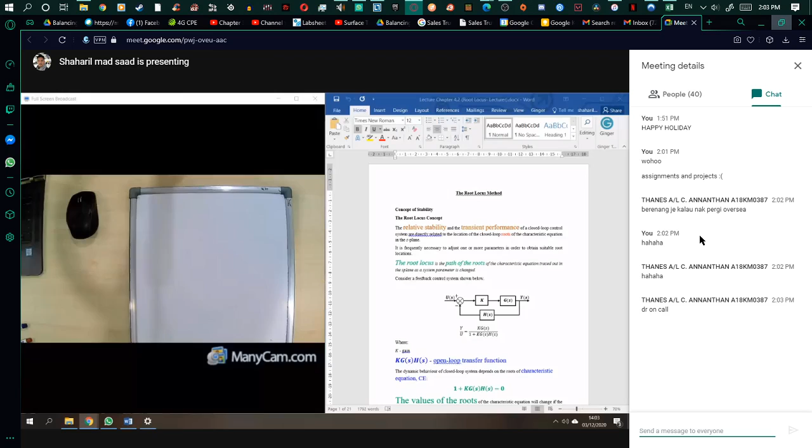Now Johor Bahru is quite critical, right? The numbers of COVID-19 is increasing day by day. Okay, alright. Doctor on call, okay, good.

Last Sunday, yes, we learned about root locus. Okay, so we drew a root locus there. By the way, there are some rules that you need to follow. The most important thing is the starting point is the open loop transfer function, KGH, right? And then you plot them. If it's a pole, you make a cross; if it's zero, you make a circle, right? And this is the rule for the locus.

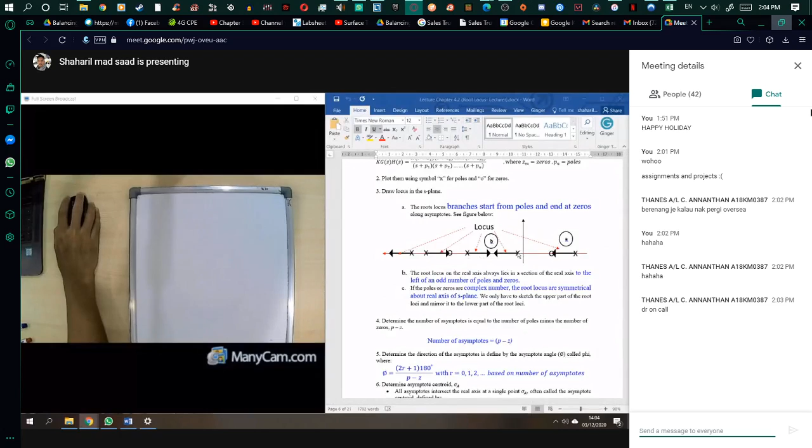So the girl cannot meet girl, man cannot meet man, right? So if you have pole and pole, that means there will be some breakaway. Okay, so for today we will look at if we have a complex pole. Based on this guideline, we can see that if the poles or zeros are complex number, the root locus is symmetrical about the real axis of the S-plane. We will look into that, so we just need to sketch the upper part of the root loci and mirror that.

Okay, alright, and then you have done this one, determine the asymptote and so on. Okay, we also have done this one, breakaway and break-in point. So then we want to see what we call it.

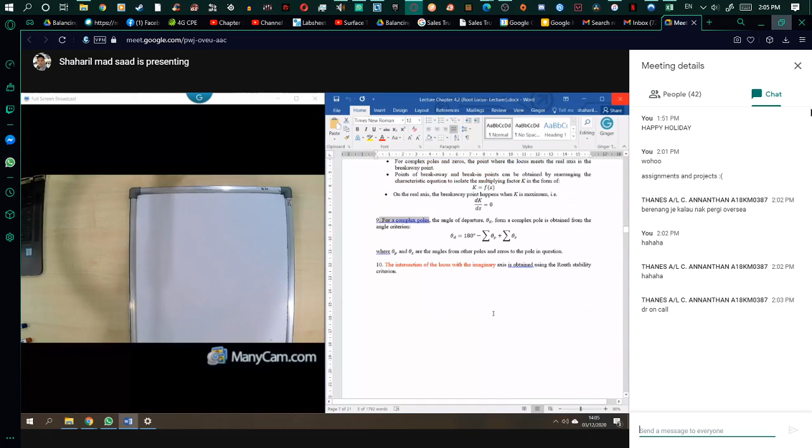Okay, number 9, we're not done yet for the complex pole. We will see the departure angle after this, and the intersection for the imaginary axis, so we can do that by using the Routh stability. So we can find the Routh table using that. And then we've done this one, done. So after that we can see the intersection point. It should be 96 here, right?

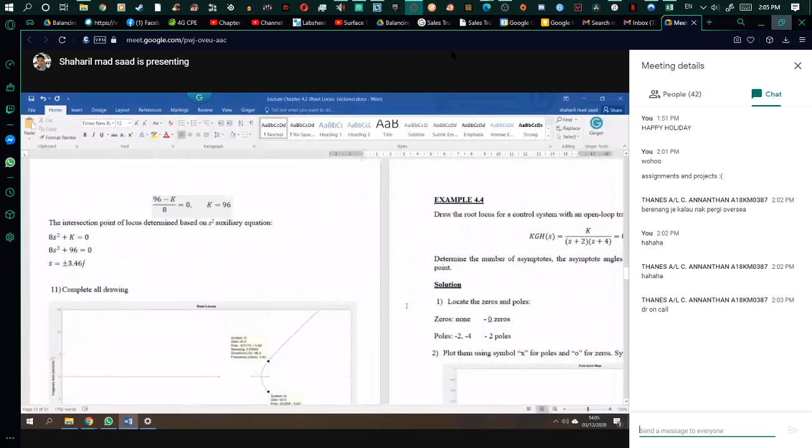Okay, then this one, the intersection there. Alright. Okay, and for example 4.4, I just we'll just go through this one.

So you are given KGH, the open loop transfer function, and then from this one you can find the zero. In this case, you don't have any zero - you don't have S plus something. You only have the pole, which is equal to -2 and also -4. So that means the zero is 0, and the pole is 2.

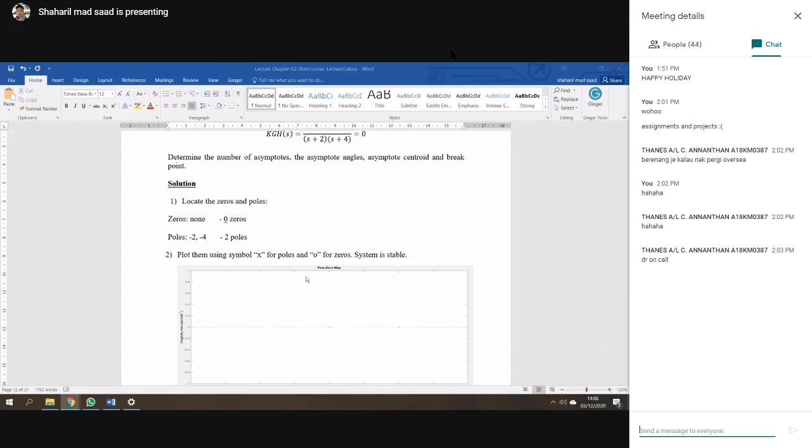So this one, in order to find the number of asymptotes, and then you plot it using cross for the pole and circle for zero. You plot it, and then next you draw the root locus on the real axis first. Okay, so you can see these two poles lie on the real axis, so you just draw it. Because you have two poles here, there will be some breakaway, right?

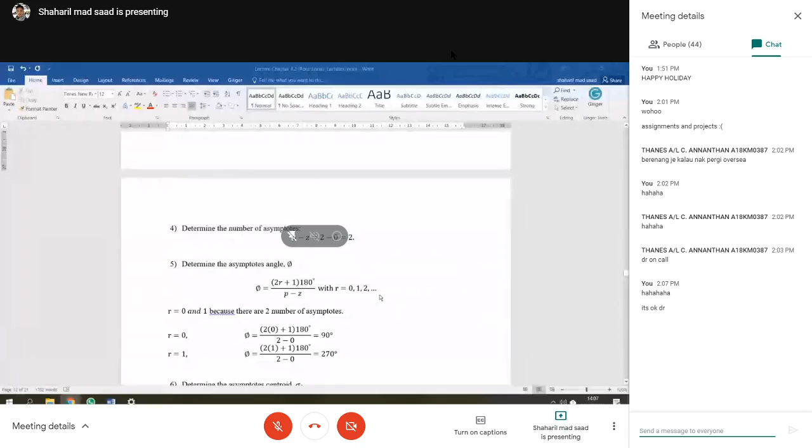Sorry guys, my daughter - I asked her to sleep, but she's hyperactive now.

Okay, and then determine the asymptote angle. Okay, and then you find P and so on. Based on this, the asymptote angle depends on your number of asymptotes. Okay, so asymptote means the guideline in order for you to draw the locus.

So for example, this one you got the asymptote angle equal to 90. So that means you draw this one to be 90. Okay, but in order to draw this, you need to find the asymptote centroid first. So how to find the asymptote centroid?

So the summation of pole, right - that means you only got minus 2 and minus 2 plus minus 4, and you don't have 0. This will be minus 6, then divide by number of asymptote, P minus Z. So 2 minus 0, you get minus 3. So that means your asymptote centroid is minus 3 here.

Okay, then you need to draw two asymptotes. One is 90 and the other one is 270. So that means this one 90, 180, 270 here. Right, so this is the asymptote. Okay.

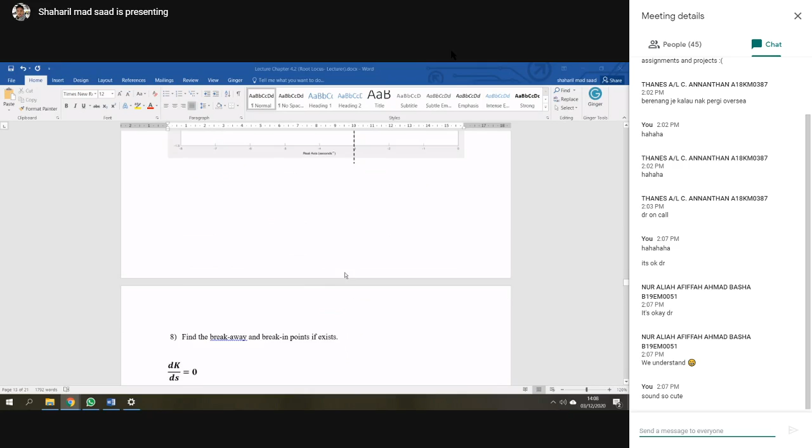And then after that, we need to find the breakaway because this is two pole, right? So there will be some breakaway. Okay, so how to find the breakaway?

So you need to use the characteristic equation 1 plus KGH. From that, you need to find dk over ds. Then we find the k here. So we find the dk over ds. Okay, this one, dk over ds equal to 0.

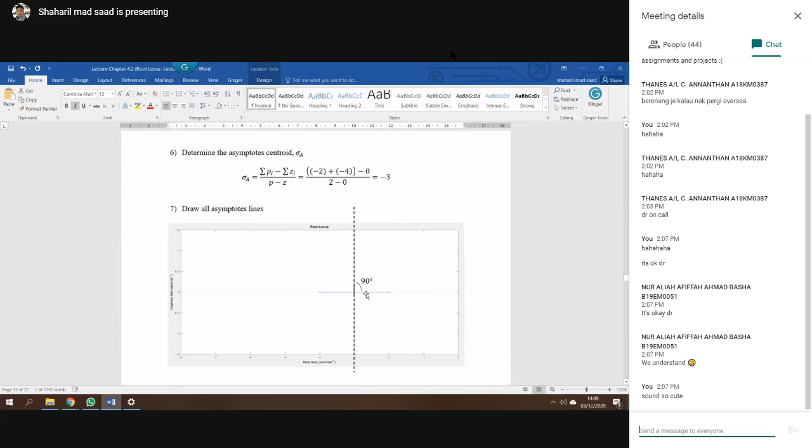And then you got it 2s plus 6, and then you got s equal to minus 3. So that means the breakaway will be also at minus 3, okay, at here.

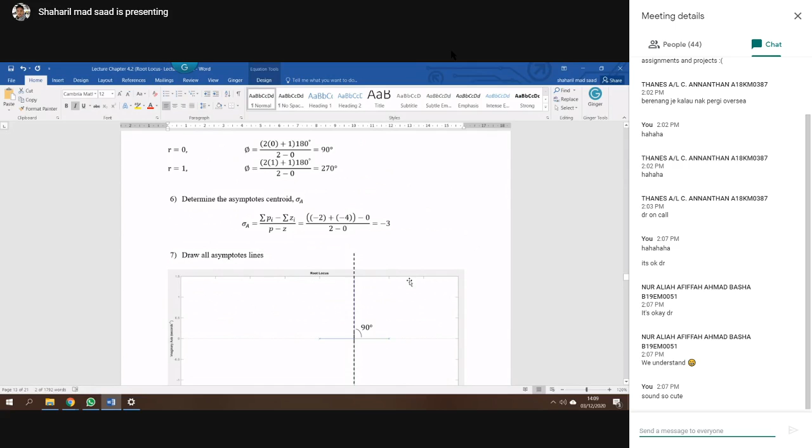And then, okay, so you draw the root locus. Okay, done. Intersection, that means there is no intersection, right? Because you can see that the asymptote angle is going straight. Okay, so that means your root locus will go straight. So there is no intersection to the imaginary axis. There is no intersection. Okay, good.

So then you complete your drawing. So you can see that this pole, the first pole, it can be going down, right? And the second pole, it can be going up, right? So it doesn't matter if you write it going up or going down, right?

But in order to know in detail how it's going down and going up, you need to do like what I told you before. You need to put in the value of k here. If that's it, then you try to find the roots, right? K equal to 0, k equal to 1, k equal to something. Okay, all right.

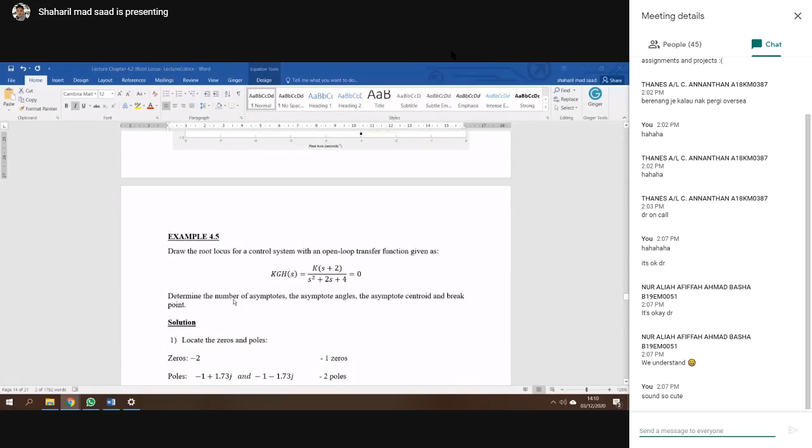That's it, example 4.4, all right. I hope that everyone can take a piece of paper, we can do it together. Maybe you can share with me how you draw your root locus.

Okay, everyone, so I want to do this example 4.5. Okay, done. So example 4.5: draw the root locus for a control system with open loop transfer function given as KGH. You are given KGH equal to k times s plus 2, divided by s squared plus 2s plus 4.

So for today, we want to look at if our system has a complex pole. Okay, so what happens, right? So I hope that you take out a piece of paper and then you can follow my step.

Okay, so that you can learn it, right? So first one, you need to locate the zero and pole. Okay, pole and also zero. So right now we have pole, zero first. Okay, zero. Zero now you have, right? This one, zero, you look at the root at the numerator, right? This one the denominator. So now you have the zero.

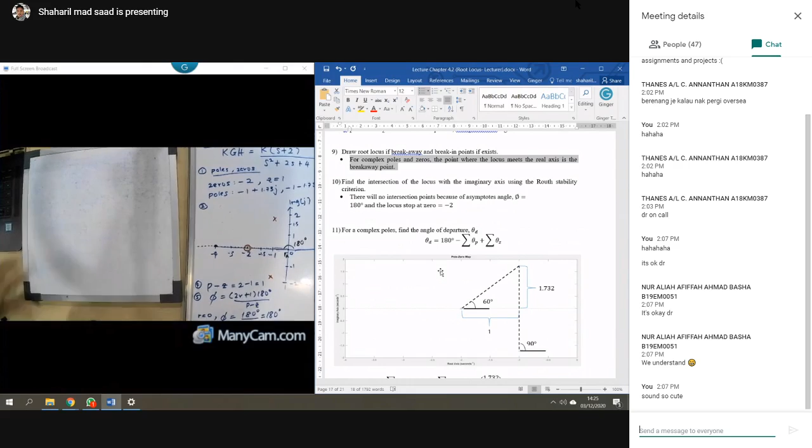So far so good, can you follow? Boleh. Boleh doktor, boleh. Muhammad Azmi, suara boleh, macam sir, perempuan je. Okay, alright.

So how to find the departure angle? Actually you can draw it on your graph, but I just want to draw it here. So now this one is your pole and this one is another pole. This one is the axis.

Do you understand it? Connect this one, then you just choose one pole here. And then we want to see the departure angle. For example, we want to see the departure angle from the pole here, because the pole is going to 0.

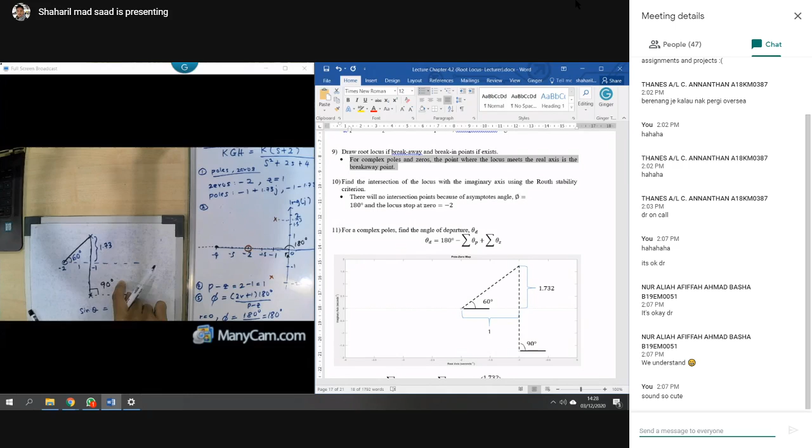Then we can find it using this formula. The departure angle from the pole is equal to... what's the formula? Theta D is equal to 180 minus the summation of pole angles plus the summation of zero angles. So 180 degrees minus the pole, this pole, that's 90 degrees.

And then from the 0, you plus it with 60 degrees. Choosing one pole, we look at what the angle is. This pole to here is 90 degrees. And this zero to pole is 60 degrees. Then you can find that it is 150 degrees.

For this part, do you have any question? Ada persoalan tak? Doctor, is that tangent theta?

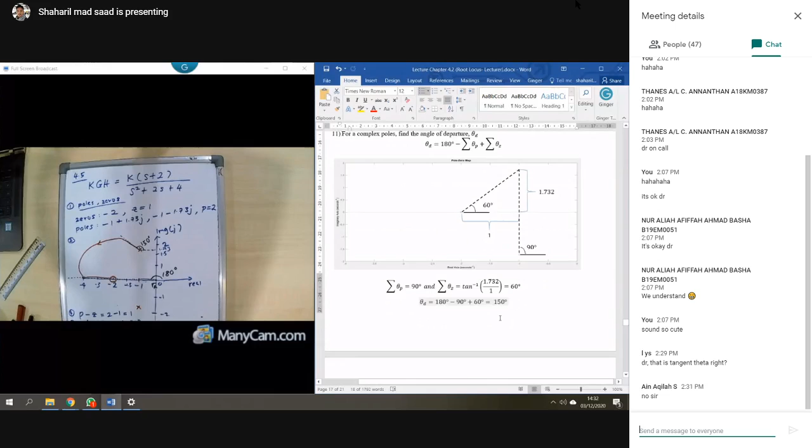Okay? Can you get it? Boleh dapat? Boleh tak? Boleh eh? Okay, alright. So the next thing is one pole.

One pole has chosen this one. So how about this one? It's only symmetrical. 150, 150 is about this one.

Okay. Right. So your locus now will be symmetrical. Okay, this one going to 4, but it's going to that. Okay lah, symmetrical. But the size is not symmetrical. Okay, this will be your locus.

Alright. Now you will see that this one is starting from k equal to 0 and it will end at k equal to infinity. And this one is k equal to 0 and then it will end at k equal to infinity. Okay. Then this one is about 150 or so. Alright. Okay. Now, is it clear?

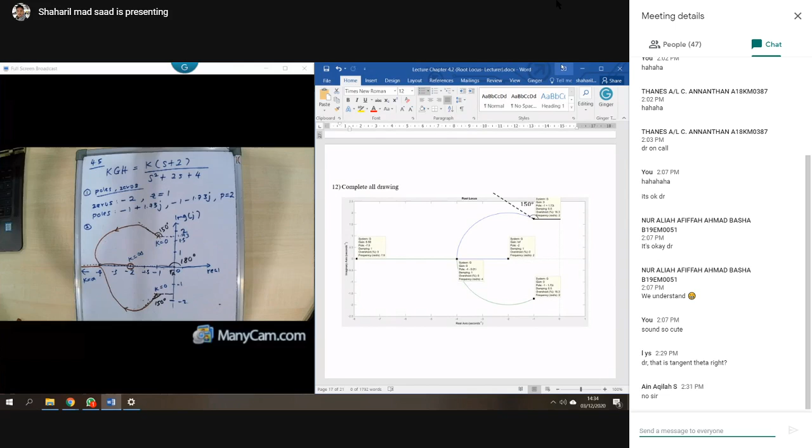Anyone? James Kwek? Ada buat. Okay. Maybe you can share. Do you want to share? You can share on your group. How to share? I don't know how to share. WhatsApp. Okay, boleh. Alif also.

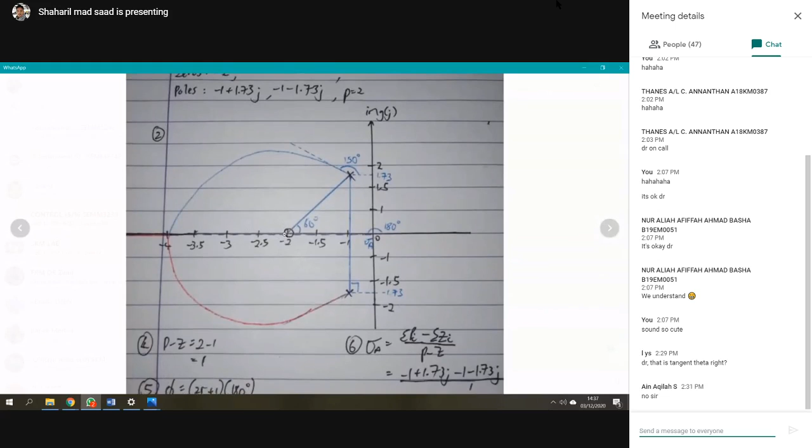Actually, the locus is not touching the real axis, and also it is not touching the asymptote, right? It's almost touching. Okay, almost touching. Okay. Zikri. Okay, good. But you should have another locus there going to infinity.

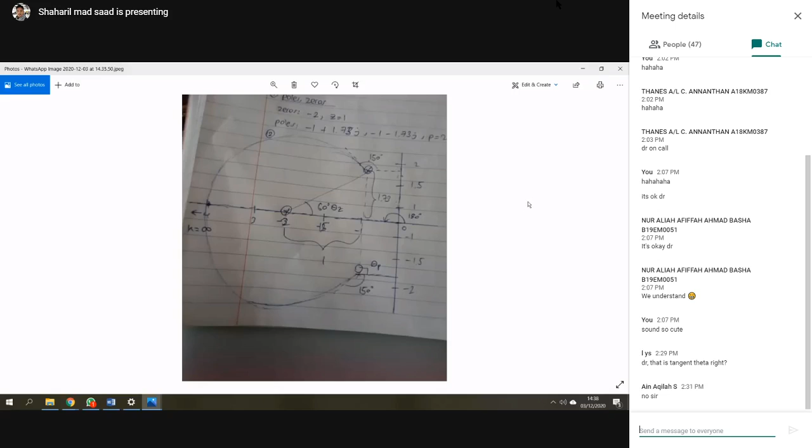Yeah. Alright, good. So this one is the example for 4.5. Good. So I hope that you can clearly understand how to draw the locus, how about the complex pole, and so on. Okay, so let's move to another example.

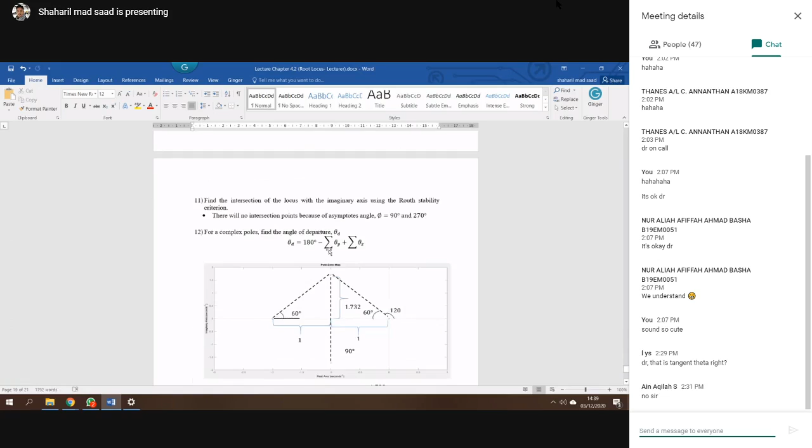Okay. Alright. Example 4.6. Yeah, I need to draw it again. No. Okay, I'll just go through it. Okay, example 4.6. Everybody, can we proceed? Okay. Example 4.6. What you have now is KGS. So first, you need to locate the poles and zeros.

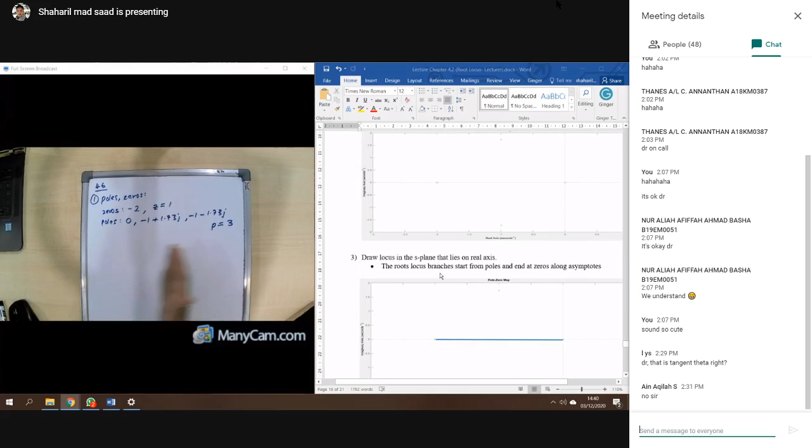Oh, can I undo? Why did I delete all that? Okay, can't undo. Hey, I need to draw it again.

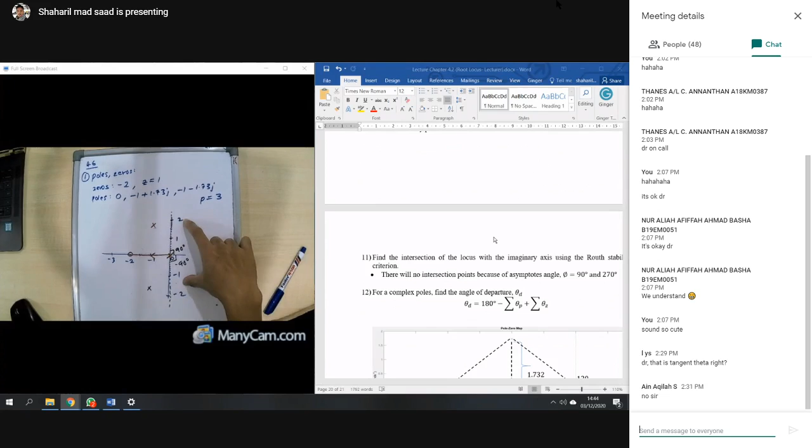Okay, and then what else? No breakaway, no break-in and so on. Intersection. Do you have any intersection here? You don't have any intersection here, right? Because it has been blocked by the asymptote. So no locus can cross the imaginary axis. Okay, and then you need to find the departure angle for this one. So how to find the departure angle?

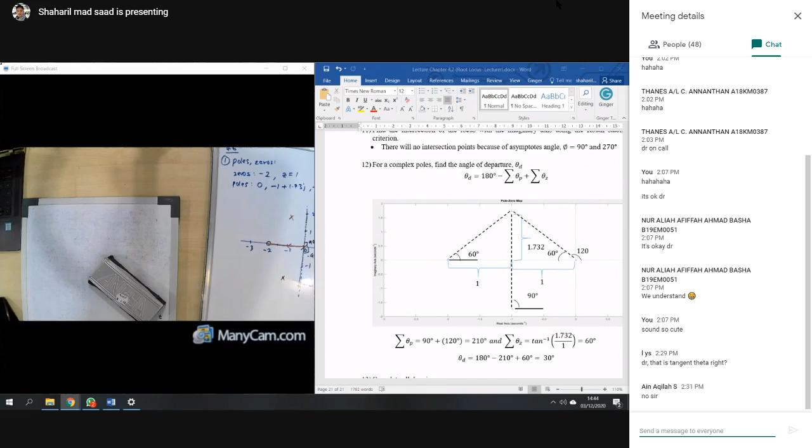Sarah, I'm moving fast. Go there. Oh, battery low. Low battery. Nah. Go, take mine. Okay.

How to find the angle of departure. Okay, now you got these 2 points here, and you got this one. Actually, if you want to make it clear, you can draw this one. We just choose this point. Okay, and then this one, and then this one. Okay, done.

So this one will be 1.73, this one will be 1, and then of course you got here 60 degrees, based on tangent, right? So tangent theta is equal to 1.73 divided by 1, so theta is 60 degrees. And this one you got 90. How about this one? This one is 1, so this one is 60 degrees, right? But we want here 120 degrees.

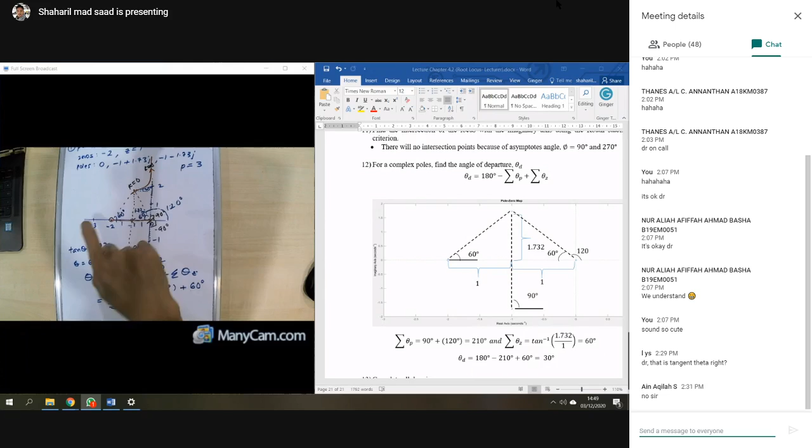For the complex pole, remember you need to find the departure angle. So how to find the departure angle? You just choose one pole for the complex poles and then make all the dotted lines go there. Then you want to find the angle to that pole, right? So this one is the angle to that pole. Okay, right, done.

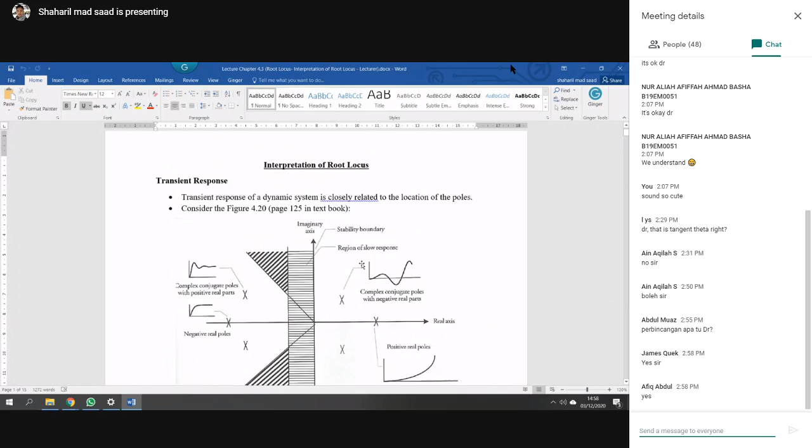Okay. Now, we have drawn the root locus and so on, right? So what can we get from that one? The information that we can get from that one: whether the root locus represents a first order system, a second order or third order and so on. How about the time constant? How about the damping ratio, right? And so on.

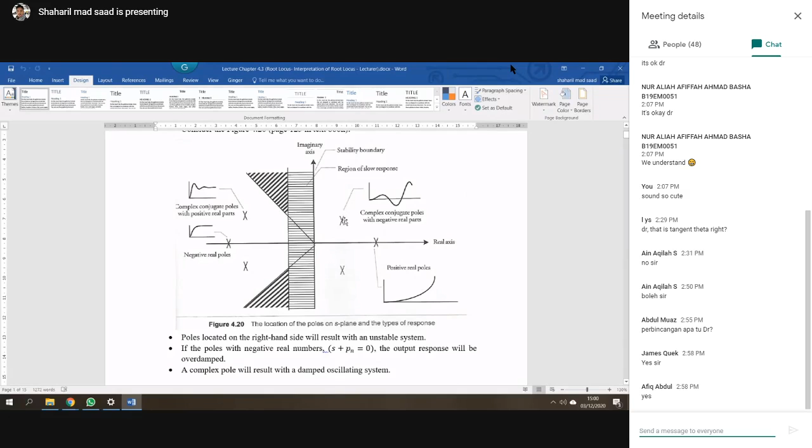Transient response of a dynamic system is closely related to the location of the poles. So you can see here, a pole located on the right hand side will result in an unstable system. If a pole is located at the right hand side of the imaginary axis, our system is not stable. By drawing the poles or zeros, you can see our system is not stable.

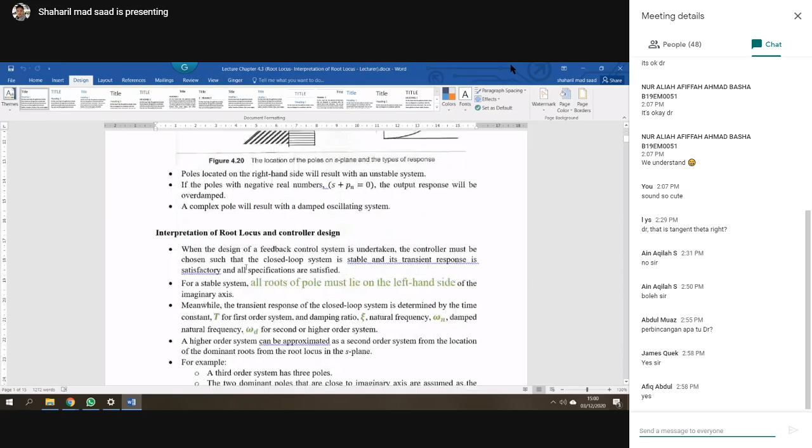And if the pole has a negative real number, that means s plus a equal to 0, so s equal to minus a, located on the real axis. For example, one pole located like this, so we can say this one will react as a first order system. And if the system has complex numbers, it will react as a second order system, where you have the damping ratio, the natural frequency omega n, and omega d also, and so on.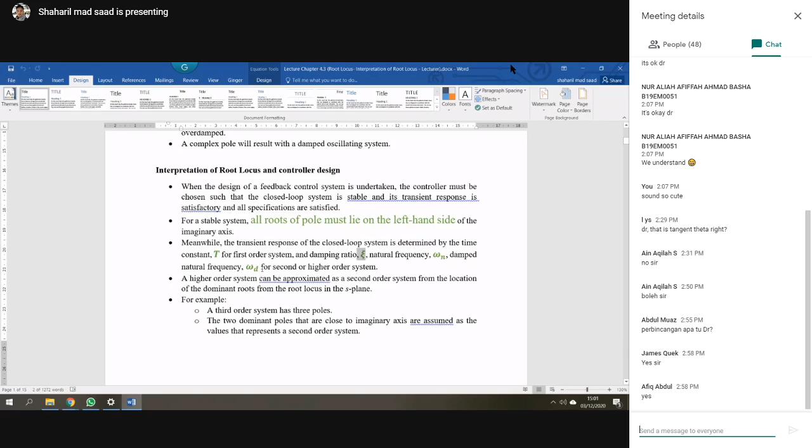So how to interpret the root locus and controller design? We need a closed loop system that is stable with a good transient response, depending on the time constant and so on. The transient response has a few parameters, for example the time constant for the first order, and damping ratio, natural frequency and damped natural frequency for the second order. So for higher order systems, for example third or fourth order, how can we interpret that? By looking at the dominant roots on the root locus in the s-plane.

For example, a third order system has 3 poles. The 2 dominant poles that are close to the imaginary axis are assumed to represent a second order system. So if you got three poles, we can say that our system reacts like a second order system, because there are 2 dominant poles.

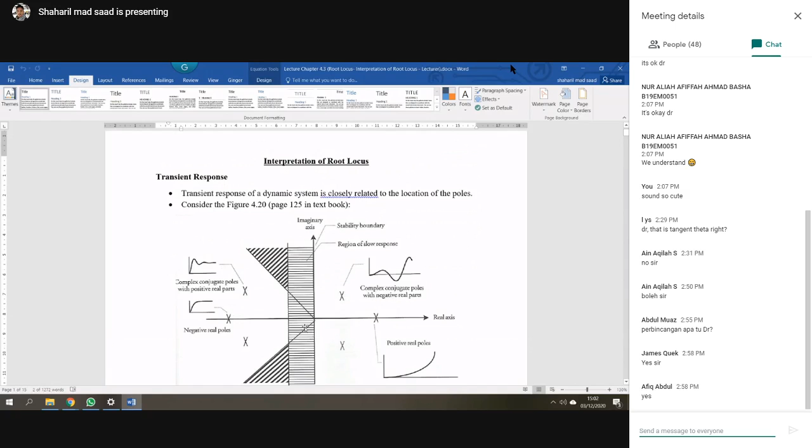And from that root locus, we can get the time constant, the damping ratio, omega n, and also omega d. And we also can get the k. So this one is quite interesting, how to calculate the k. Alright, so maybe I can show you in MATLAB.

Similarly, if we know the pole value, we also can get the time constant and so on. So the graph will be like this one. Now, imagine that you got 2 poles here. So let me draw it again. Okay. All right.

Okay. Now you got 1 pole here and 1 pole here. And maybe you can get 1 pole here. All right. So this is our locus, right? So this pole value, right? From this pole value, we can get a lot of information.

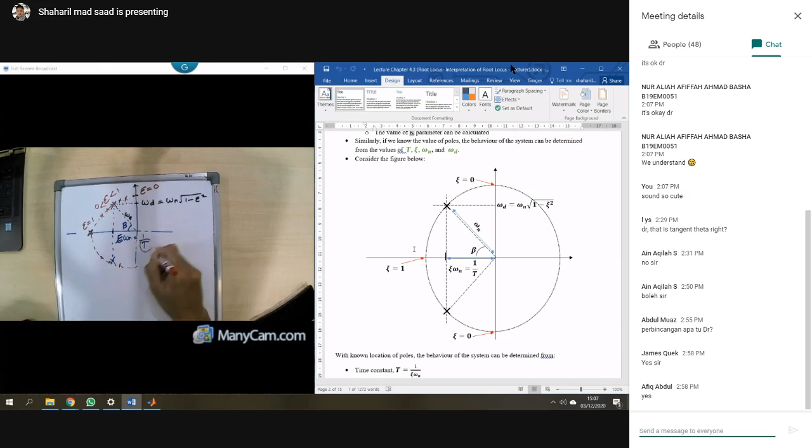Then omega n, and this one omega d. So this is the information we can get: time constant, omega n, and the damping ratio. So how to get the damping ratio? It is cos beta. The cos beta is damping ratio omega n divided by omega n, so you can get the damping ratio. And then you can get omega d from here.

Time constant is equal to 1 over damping ratio omega n. So from this pole we can get these parameters. And if you can get these parameters, you can draw the response. Now, the introduction for this topic, is it clear? Faham tak? We have drawn the root locus, so how can we interpret it and get the information from it?

Boleh? Right? We will look at the example. Ada apa-apa soalan tak? Clear tak? Clear. Okay. Guys? Yoo-hoo? Clear? Do you have any question? No?

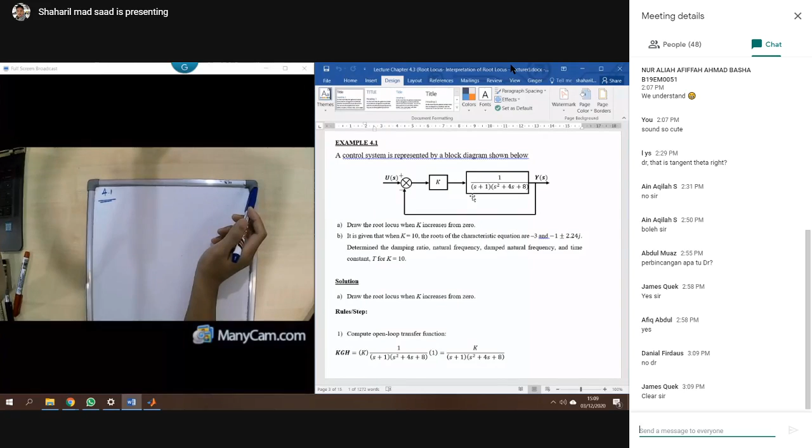Okay, good. Let's look at example 4.1. Before this, we were given KGH straightaway. Now you are given the closed loop block diagram, K and 1 plus something. Draw the root locus when K increases from 0 to infinity. And for B, given K equal to 10, the roots of the characteristic equation are minus 3 and minus 1 plus 2.24j. We will look into that.

So now you need to draw the root locus. Given the block diagram, you first find the open loop KGH. KGH means K times 1 over (s plus 1)(s squared plus 4s plus 8), and H is only 1. So KGH is K over (s plus 1)(s squared plus 4s plus 8). Remember, from the block diagram you get the open loop transfer function first. And then step number 2, locate poles and zeros.

Now you got the zeros. There is no zero, meaning no finite z. And then you got the poles: minus 1, minus 2 plus 2j, and minus 2 minus 2j. Okay, this is the information.

Alright. And then step 3, you can get the number of asymptotes, p minus z. So p is equal to 3, so 3 minus 0, you got 3. And then number 4, you start to draw. Minus 1, minus 2. Now it's 0. Minus 1, minus 2. 1, 2. Minus 1, minus 2. Okay.

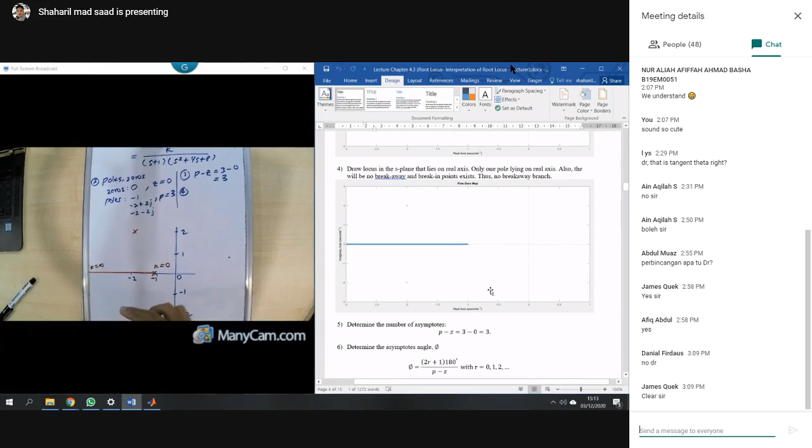So if you look at that, you only have one pole here, right? It tries to find a zero. So the first pole is going to the left, so this one is going to here. It starts from k equal to 0 and goes to k equal to infinity. So this is drawing the locus on the real axis first. Done. And then you determine the number of asymptotes and so on.

And then you got the asymptote centroid, minus 1.67. So it's almost 1.5, 1.6. Okay. And 60 degrees, 180, and also 300. So you got 3 asymptotes there: 1, 2, 3.

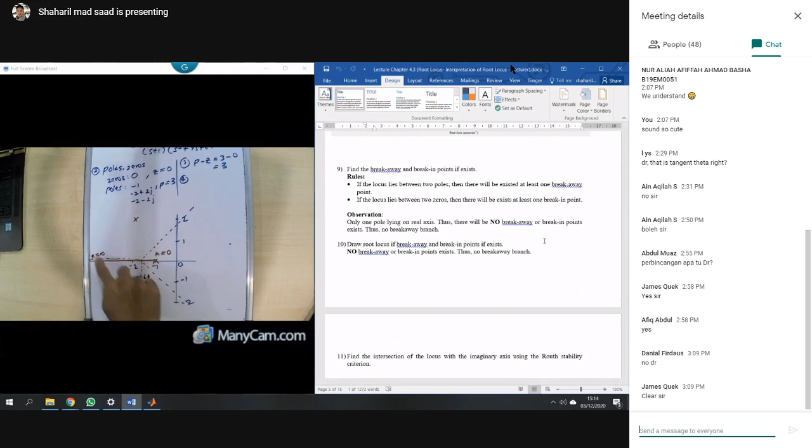And then the breakaway, look, there is no breakaway. This pole is going to find a zero. There is none. No breakaway, but it will have some intersection there. This pole is going to follow the asymptote, right? So it tries to cross the imaginary axis.

So how to find the intersection on the imaginary axis? You need to use the Routh table. Number 11. So find the characteristic equation, 1 plus KGH equal to 0. That means 1 plus k divided by (s plus 1)(s squared plus 4s plus 8) equal to 0. Then you get s cubed plus 5s squared plus 12s plus 8 plus k equal to 0.

Alright. And then you do the Routh table: s3, s2, s1, and s0. Remember, for s3 the coefficient is 1, then you skip to 12. Then 8 plus k is together. So this one is 5, and then 8 plus k here. The other one is 0. This one is divided by 5. So 5 times 12 is 60.

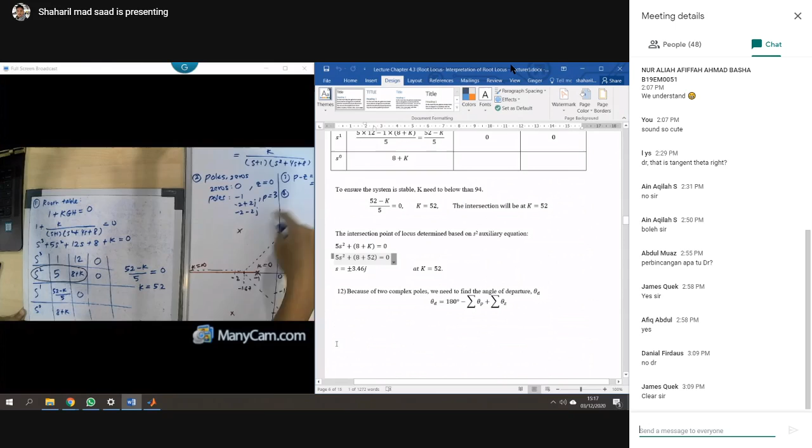Done. And then from this point, you need to find the root. You can choose this one. Why choose s power of 2? Because at this intersection you have 2 poles, so you will have 2 intersections there. That's why you choose s power of 2. So 5 s squared plus 8 plus k equal to 0.

So now you got 5s squared plus 8 plus 52 equal to 0. 5s squared equal to minus 60. Then s squared is minus 12, and you get s equal to plus minus 3.46j. So coming back to here, this one is about 3.4, 3.5 here. There will be some intersection there.

Then you have a complex pole. That means you will have the departure angle. So how to find the departure angle? Now you need to connect all the poles, so this one and this one. This one is 90 degrees, done. And this one, sometimes it will make you confused. So this one is 1, and this one is 2. All right.

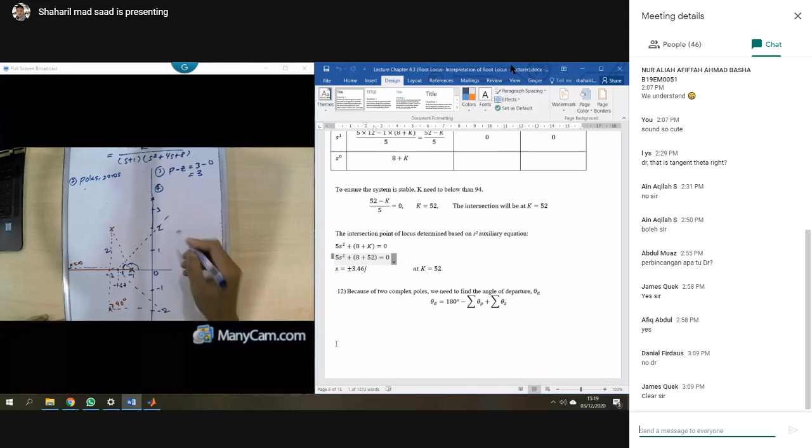So you only have 3 poles, 1, 2, 3. Okay, good. So that means we need to find the angle to this one first. And before that, you can find the angle to this one, right? So you can get tangent theta is equal to 2 over 1. So theta is equal to...

What's wrong? What's wrong is it? Can somebody look at that? Minus 1. Okay, there's something wrong here, right? Example 4.1.

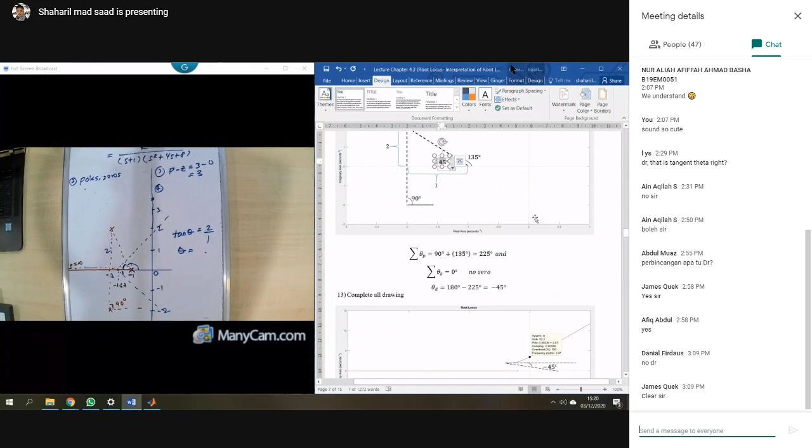Okay, alright. In this slide, I think there will be some mistake there. This one will be equal to 1, right? Right? Correct? Guys, correct? So this one is equal to what? 64, right? And this one equal to 116.

Please correct that one. Alright. And you can get 116 here, and then this one you got 206 here. Okay, 206 here, and then you got 26. Okay, right.

Sorry guys. So you need to update the notes, right? Okay. Done. Okay, now we can get it here. Here is 116 degrees, and here is 90 degrees.

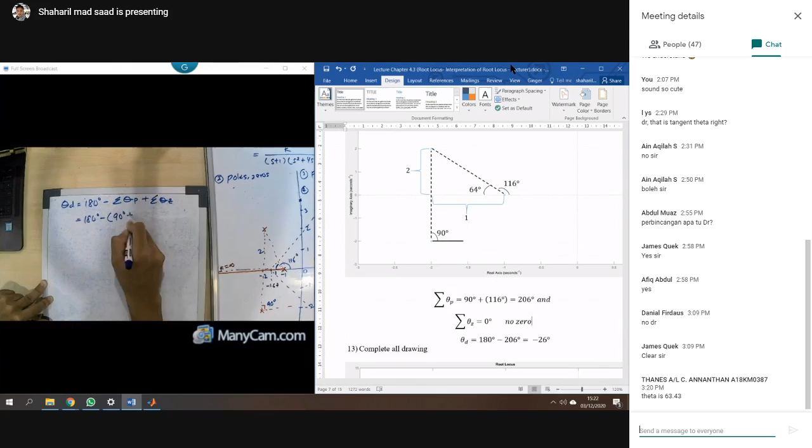Okay, good. All right, so how to find the departure angle? Departure angle, you have here. The departure angle, so 180 minus the summation of pole, and then plus the summation of zero here. Okay, so 180 minus the pole, you got 90 degrees, plus 116 degrees, and you don't have zero, so you will get minus 26 degrees, right?

Okay, right. Done. So how to draw at this point? Minus 26 degrees. So this one and this one will be minus 26 degrees.

Okay, so the departure angle, it will go to this one, and then it will meet what we call the asymptote, and then it will go to this. Okay, and this one will be minus. Okay, so of course this one will be plus 26 degrees. Then the cross one will go to this, then it will go this. Okay, so this is the locus.

Right. Okay. Can you get it? Can you see? Can you understand? Sorry, I'm not... Doctor, for the 116, so for example the 64 degrees, do we need to round off straight to 64 since I got like... no, because earlier I got 63.4, so yeah.

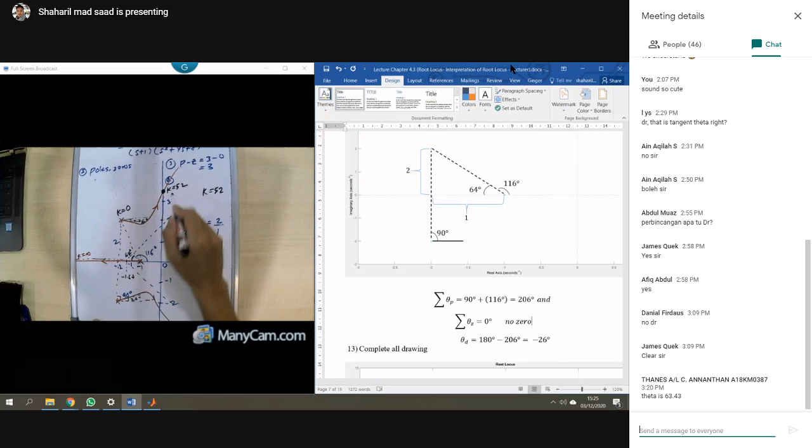Okay, remember we got k equal to 52, right? K equal to 52 is the maximum one, this one. So that means this is k equal to 0. So when k is increased, right, k equal to 1, k equal to 2, until k equal to 52, so this is the maximum one. Okay, can you get it?

Do you understand? Okay, the maximum one, also with this one, is 52. K equal to 52.

Okay, so now if you look at the block diagram here, right, if you put k equal to 52, that means your system is at the maximum stability of your system. Okay, right, so you have drawn the root locus there to describe the maximum one. Okay.

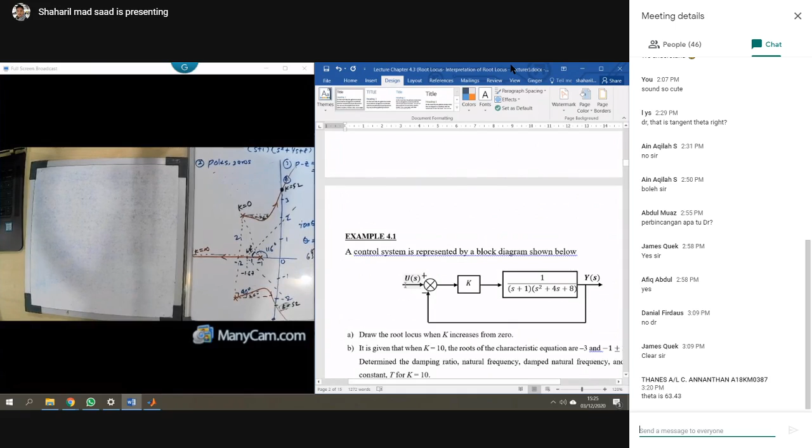If I can show you, where is it? Okay, maybe example. Is it this one? No, this one. Yeah, this one I think. Or 1 plus. Okay, not this one. I don't have this one. Okay, never mind.

So when you draw the locus, yeah, it's something like this one. So you can see that the gain equal to 52, it will be your what we call it, your stable, the final one for your system will be stable. Okay.

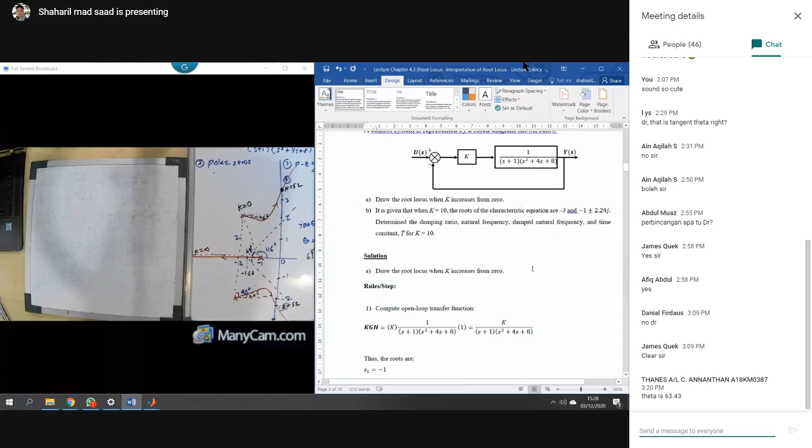Okay, now let's move. Okay, if given k equal to 10, the root of characteristic equation minus 3 and minus 1 plus minus 2.24j, determine the damping ratio, natural frequency, and time constant. Okay, let's look, k equal to 10. K equal to 10.

Almost there. So it gives you 2.24j minus 1, minus 1 and 2.24. This one, k equal to 10 also. K equal to 10, 10, 10, 10, equal to minus 3 here.

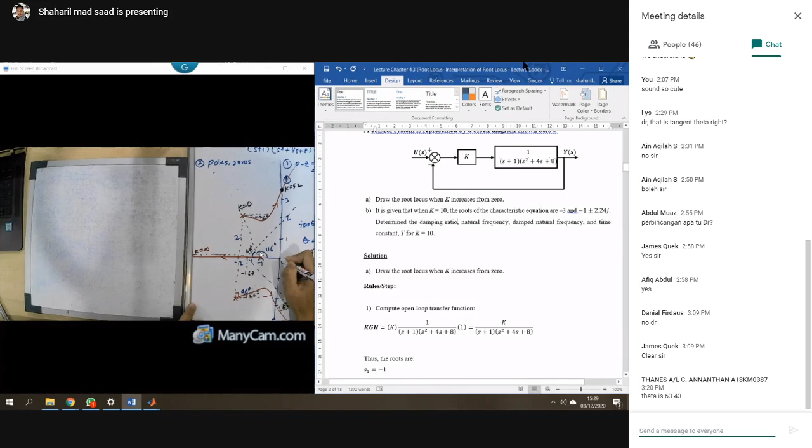Okay, so when you got k equal to 10, if you look at this one, k equal to 10, that means you will draw some line here first. So this one is equal to k equal to 10, then it will give you the root value for this one, and also k to 10 here, root value for this one.

So for k equal to 10, we want to determine what is the time constant, what is the damping ratio here, what is omega n, and omega d. Alright, so now what you need to do is apply this one.

Now you got it here, and this one gives you, maybe we can draw like this: 2.24J, and also same thing with this one, minus 2.24J. This one you get another one, minus 3.

So the information we can get from here, for this one is minus 1, so that means this is equal to 1. This one equal to 2.24. This one equal to 1. So we can get it here, this is theta.

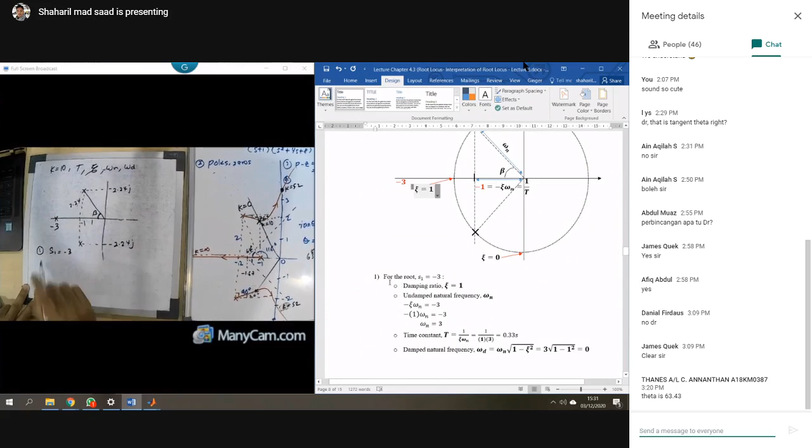And then from this one you can get omega d is equal to omega n square root 1 minus damping ratio squared. From this one you can get it is... okay, so for this root you can get all the information here.

Alright, so let's look at this root. For this both root, what you can get is omega n. This one will be your omega n here.

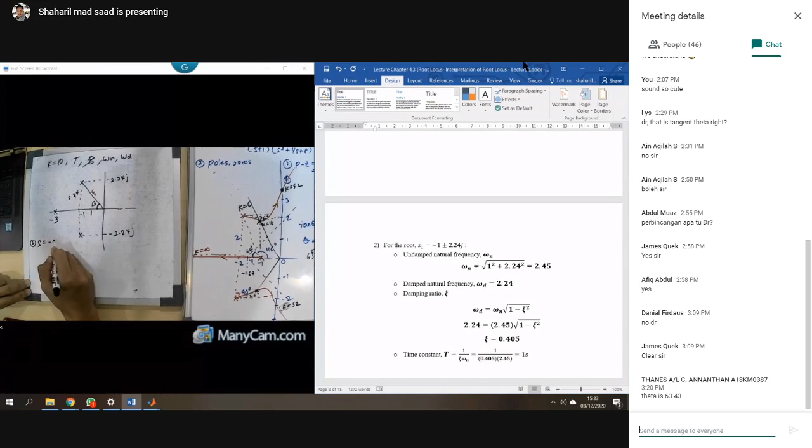So for the roots equal to minus 1 plus minus 2.24J, then we can get omega n. This is the hypotenuse, so square root of 2.24 squared plus 1 squared, you get from here equal to 2.45. Then you get omega d, that means this point, so it's equal to 2.24. And then from this one you also can get the damping ratio.

Omega d is equal to omega n square root 1 minus damping ratio squared. So from this one you can get the damping ratio is equal to 0.405. And we also can get the time constant if we want: 1 over 0.405 times omega n 2.45 is equal to 1 second.

Alright, so from this information we can get at k equal to 10 here. We can get damping ratio is 0.405, and the time response 1 second, and omega n is 2.45. So from this one we can draw our response.

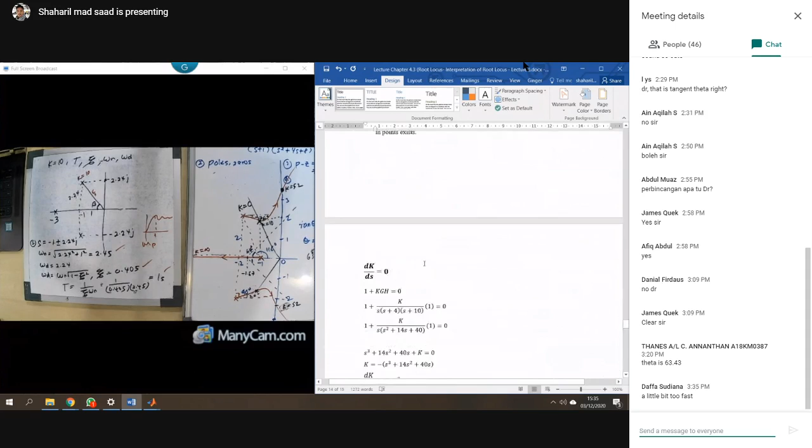Okay, so for the root locus, I think it's clear to you. For this one, we want to find the parameters: time constant, the damping ratio, omega n and omega d.

So omega d, we can get it straight away from here, right? This one is omega d. And omega n is this line, so this line we can get the hypotenuse. This one squared, and square root, we can get omega n. And if you get omega n and omega d, you can get the damping ratio here. And then from the damping ratio, you can get the time constant also if you want.

So this is how you interpret your root locus. Clear? Right? So this is where we want to know: if K equal to 10, what is the value of your damping ratio? Because your damping ratio will determine how much overshoot and so on. Also, how much the natural frequency, what is the value?

Do you have any question about this one before we go to the last example? No? Okay, good. So we go to the last example, but this last one I think will be new knowledge for you. A lot of you don't know how to use the calculator to solve the simple thing. We will look into that.

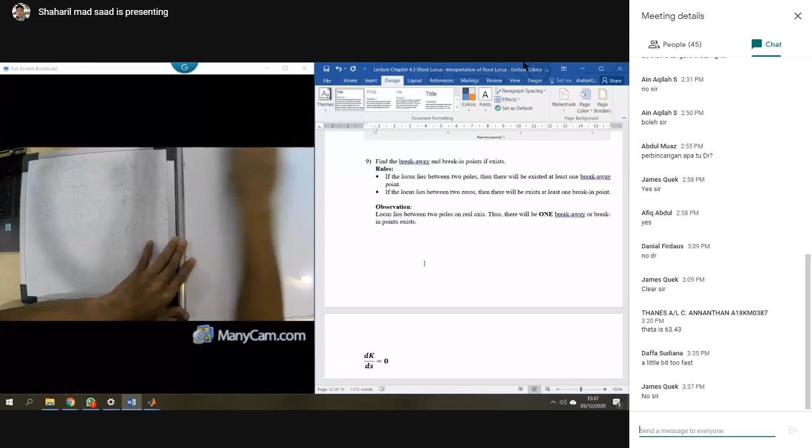This example 4.2, the last one. For a control system shown below, choose the value of K such that the maximum damping ratio is 0.5 and the time constant is less than 1 second. Okay, we are given that we want the damping ratio to be 0.5 and also the time constant less than 1 second.

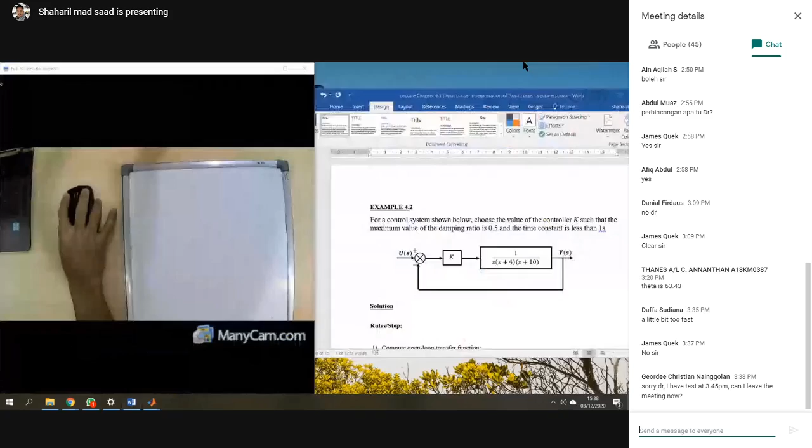So this is our objective, example 4.2. So now we want the damping ratio equal to 0.5 and the time constant equal to 1 second, that means less than 1 second. So you are given the block diagram here, and so on.

Then you start to draw the locus. You draw it, and you get this kind of root locus here. Maybe I need to draw it also to make sure you can understand. Let me just draw the root locus.

Me too, doctor, sorry doctor, I have a test. Okay, yep, you can leave the meeting now. So later on, maybe you can learn it from your friends.

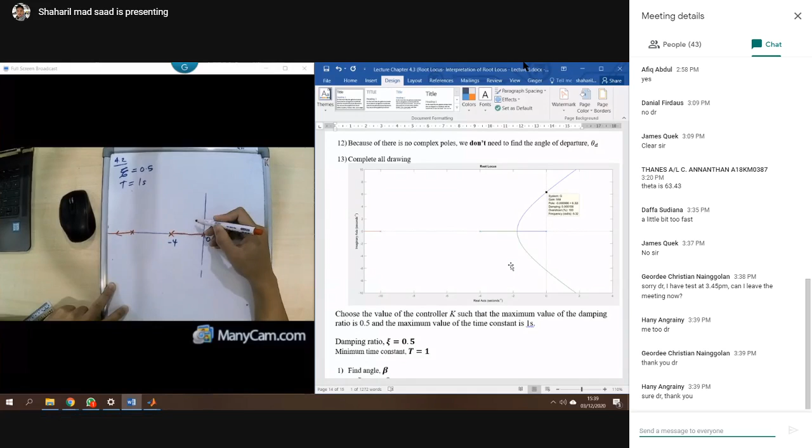This one you get with 0 here, and then you get another one here, 0 and also -4. So that means your root locus now goes to this, done. Then try to find the other one, done. Then you get a break point here, and then it will go to this, and another one goes to this. Okay, done. So clear, this one we already got this.

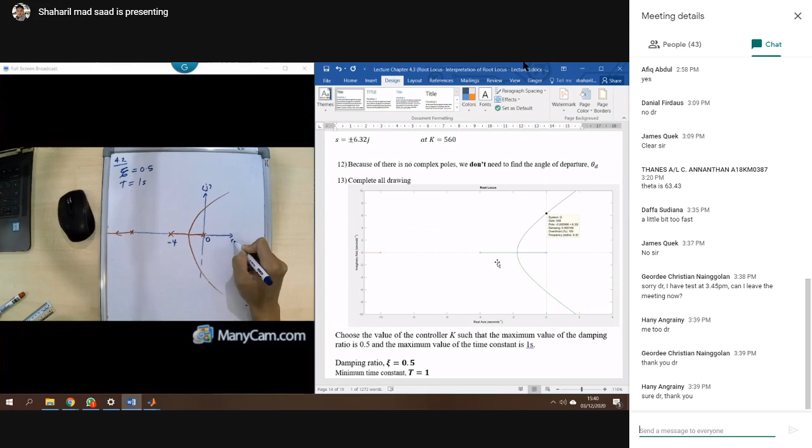This one is imaginary, J, and also real. Okay, now you want to achieve the objective they want. So that means the damping ratio equal to 0.5. So what can we get from here, the damping ratio equal to 0.5?

Remember the damping ratio equal to cos beta, that's the angle there. Then you can get the beta, right? 0.5 equal to cos beta, then you can get the beta is equal to 60 degrees. So what you can do is draw a line, this one equal to 60 degrees.

Then you get a point here, and this point gives you it. That's why for this type of question, you need to draw it based on the graph. It gives you this point, 2.46J, and then minus 1.43, this point.

So I write it again: minus 1.43 plus 2.46J. So we want the damping ratio here. So 60 degrees will give you this damping ratio equal to 0.5. Clear? This is your root locus. So at the damping ratio equal to 0.5, that means 60 degrees, you get this point, 2.46, and minus 1.43.

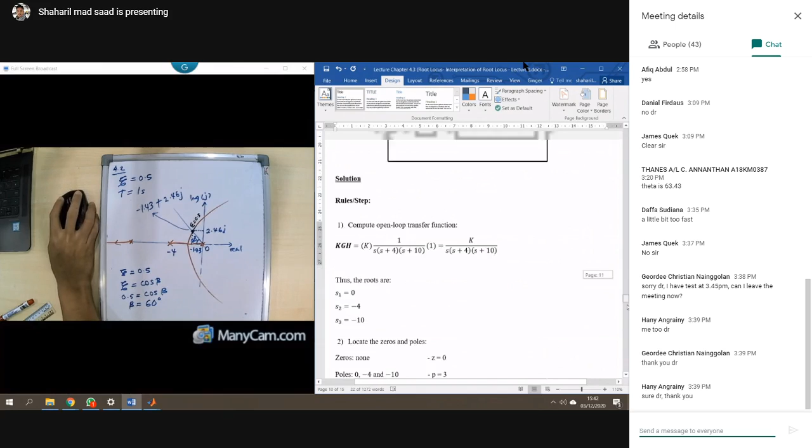So the question asks, what is the value of K here? So our objective is to know what is the value of K here. This one, we know that K maximum we can get from the Routh table. So we want to know what is the value of K here. Okay, so in order to find the value of K here.

So you can do that: KGH, the open loop, equal to 1. That means your KGH, you are given from this point, the magnitude to the point where KGH equal to 1. That means you have all these four.

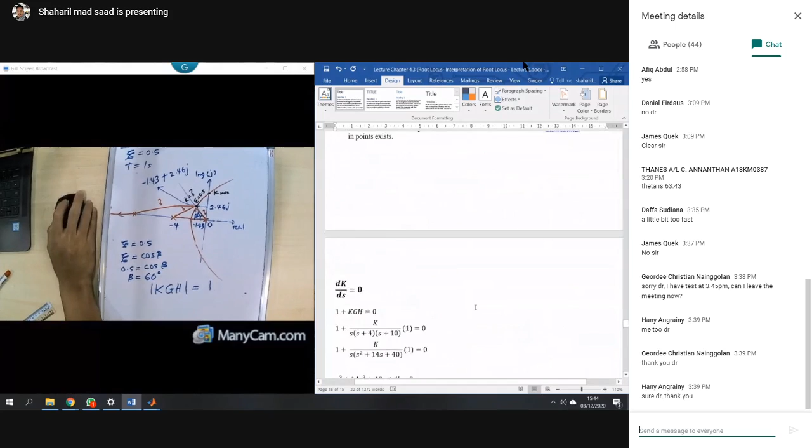So we want to know this length. What is this length? And another one, you get this one. What is this length? And another one is this one, what is this length? So this length times this length times this length is equal to 1. Alright, good. Then your KGH here is equal to, yep.

K over S, S plus 4 and S plus 10. Okay, so we want to know the magnitude for this one. That means this point needs to minus this point, right? Then we can find the magnitude.

Okay, so it's equal to K, right? Minus 1.43 plus 2.46j, you minus with 0, this point. Then we find the magnitude. And you times with, okay, and then you times with this point also minus this point.

So minus 1.43 plus 2.46j minus this point, that means minus minus 4. So minus with negative 4. Okay, done. And then another point is minus 1.43 plus 2.46j minus this one. This point is minus 10. Minus 10. Okay, done. So all this one is equal to 1.

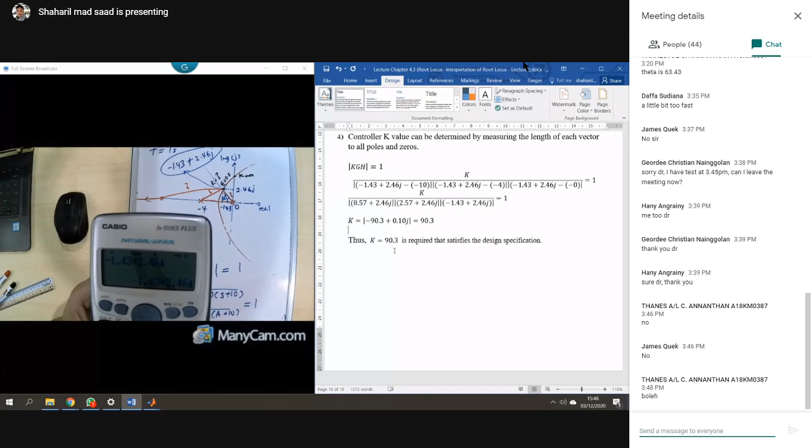So, how are we going to save this value to one variable such as A, right? So how to do that? You can take the alpha. Press alpha and A, right? Alpha A. So the A will come out, and then you press answer.

Oh no, sorry. Yeah, need to type. Sometimes I forget. Minus 1.43 plus 2.46i. So alpha A and solve. Alpha A and solve, right? It shows a question mark, right? A question mark, and then you press answer and equal. Now it will save this value to variable A. Can you do that?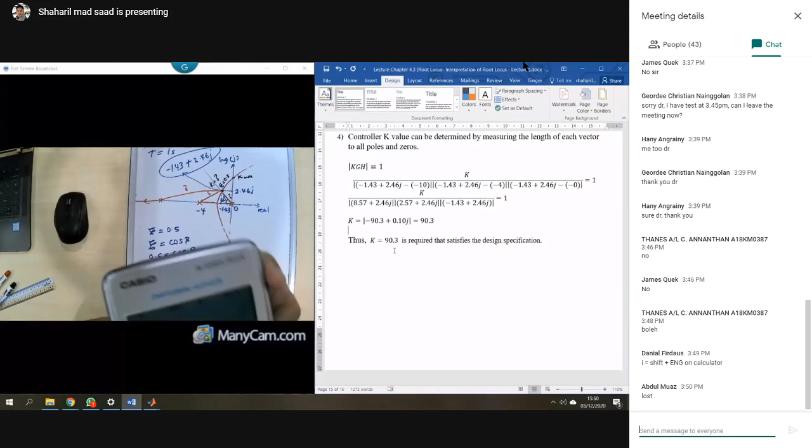Okay. I'll show you. I hope that you can get it. I will repeat. Minus 1.43 plus 2.46i. Okay, this one done, right? Minus 1.43 plus 2.46i. Okay, this one. Done. Yes. Okay, you got this one?

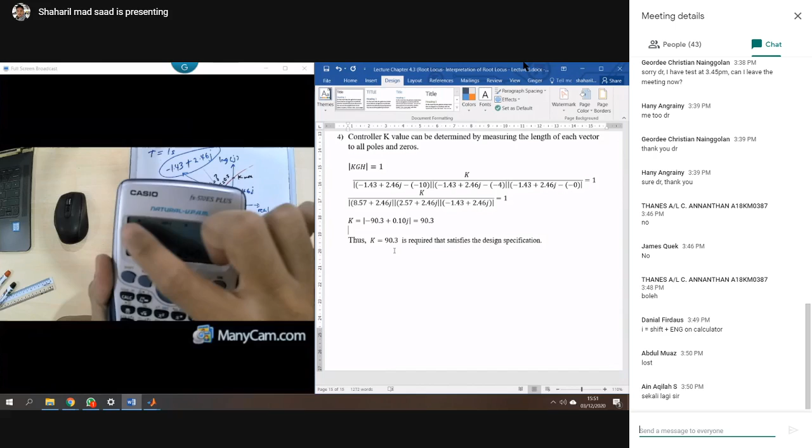Okay. Boleh? Okay. Alright.

If you press AC, or maybe you close your calculator, you can check back the value. You can press alpha and A, then press equal. So you can see, yeah, the value is already saved in your calculator. This is a new thing for you, right? Yes. Yeah. Tambah satu.

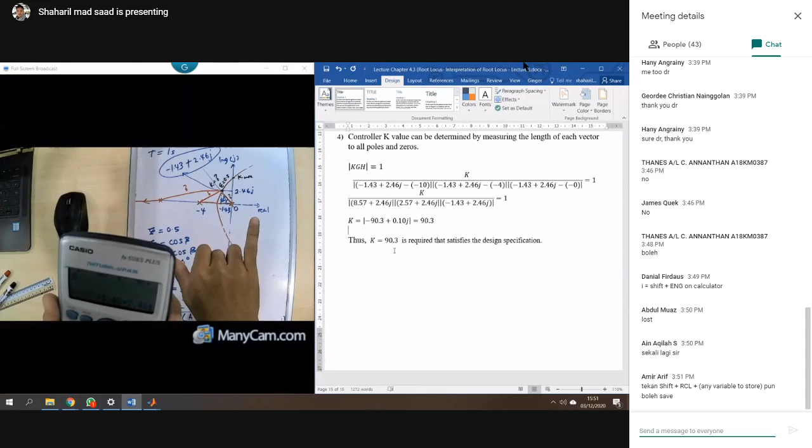Your friend also shares that you press shift plus RCL, right? And plus any variable to store, you can also save. Yeah, good. Your friend can also do it like that. Good. Amir, thank you very much. Okay. Fine? Done? Done.

Now we're going to apply A minus 0, A plus 4, A plus 10. So you just put it in parentheses, or kurungan, there. So take your alpha back. Alpha A minus 0, times with A. I will type first. A plus 10. Done. And then you press equal. You press equal, you got it.

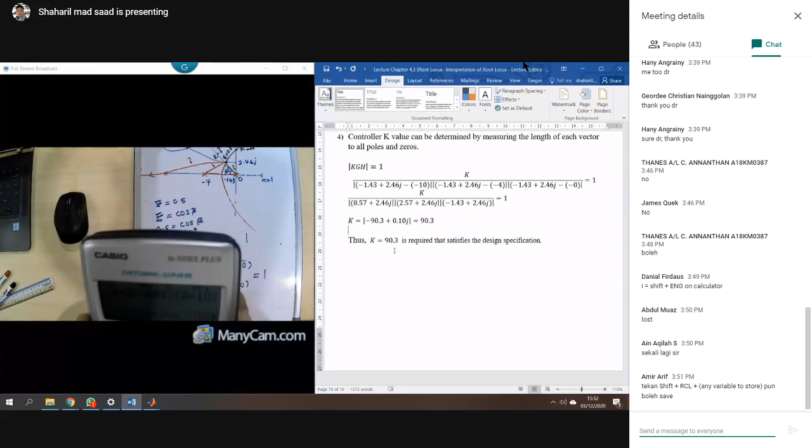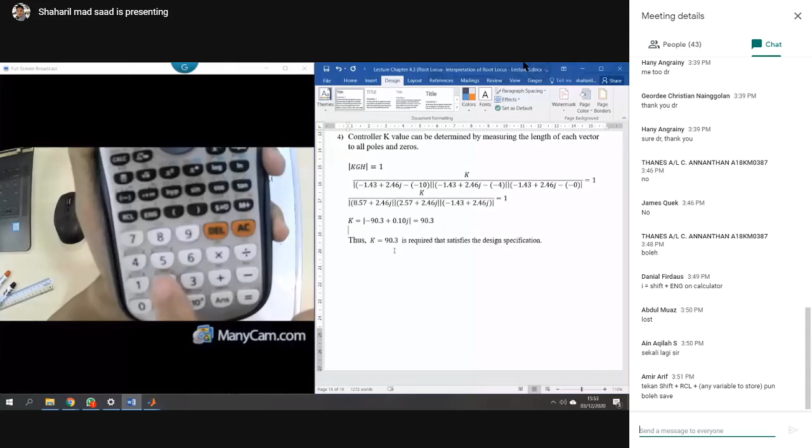90, right? 90.3. And this one is i, right? In complex number. So how to change this complex number to magnitude and angle? In this calculator, the number 2 here has complex. So you just press shift and then number 2. The words will come out: argument, conjugate, and this one the complex.

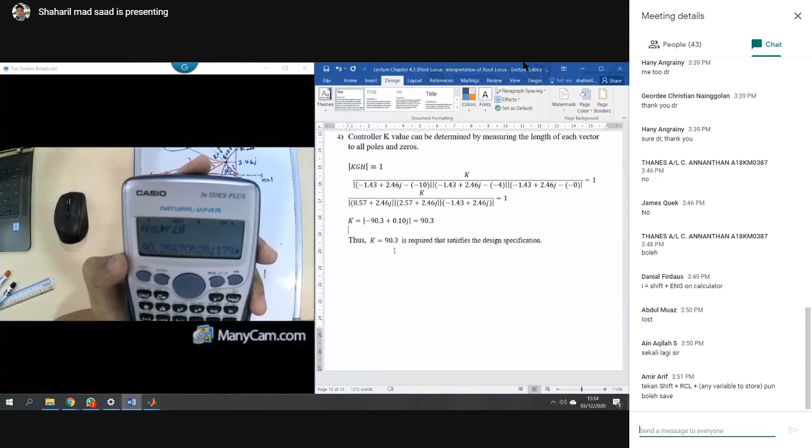So we choose number 3 and then you press equal. It will show you the magnitude, 90, and also the angle. It's a new thing for you, right? Yes, sir. Now we got it. K here is equal to 90.3. We just round it, and the angle is 179 degrees. But we just want the magnitude, 90.3.

So simple, right? Clear? Done. So I repeat it back. How to find the value for this K at this point? You already know the point, 1.43 based on this angle. So how to find the K value? You just minus this point with this one. You get the length here. This point, we get the length here.

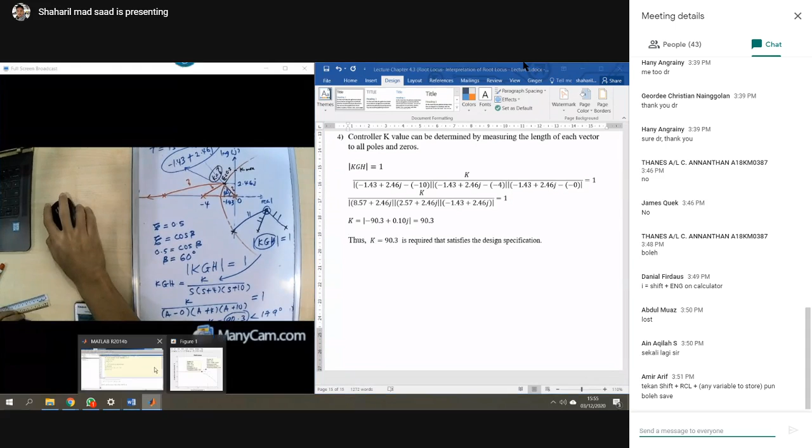Or there is one formula: the magnitude of KGH equal to 1. So your KGH here is equal to 1. So how to solve it? Just put this point minus this point, times this point minus this point, times this one minus this one. Okay, got it. So if you want to look at example 4.2 here, we can run it.

It's okay, right? So if you got another value, for example minus 0.93 plus 4.07, then you can save this value to variable A, and then minus it to all poles, and you can get the gain 2.11. Believe me. So we have answered this question. They want you to find the K value. Do you have any question?

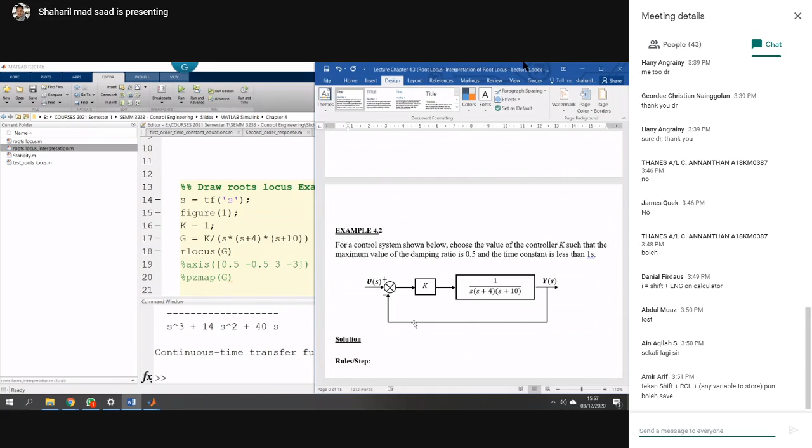Doctor, for the angle 179.9, do we need to state it too? No, it's not needed, because we only want the magnitude. So we just take the magnitude, 19.3. So where is this 179 angle, Doctor? The angle, I can't really say where it is. Alright. Thank you, Doctor.

But there are two methods. If you calculate it by typing again this one minus 10, this one minus this one, it will take a lot of time, right? So you just use your calculator, save it to variable A. I think this is a new thing for you, or maybe you've done it before. Last but not least, any question? No, Doctor.

Okay, good. So we can get the K max by looking at the intersection. But how to get the K in between, around this one? We need to use this formula. So I think that's it for our class.